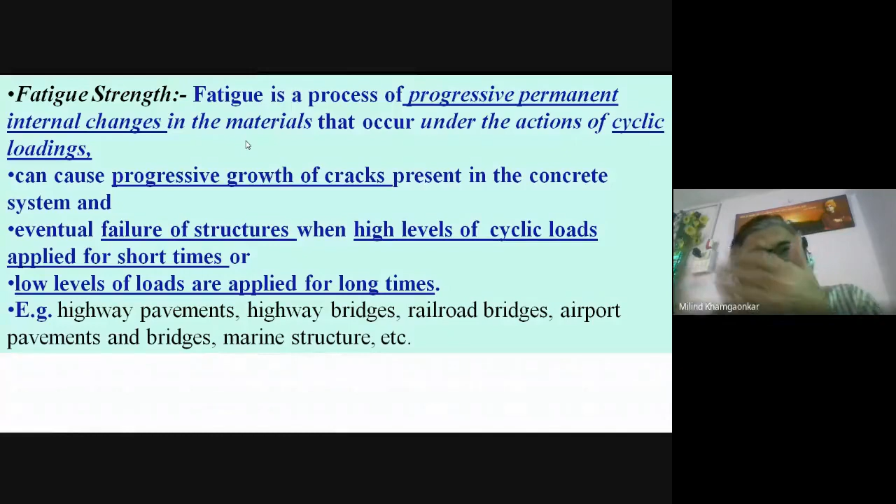Due to the internal changes in the concrete structure due to the application of constant load on that concrete structure. That load which is applied on the concrete may not be the load at failure. That may be less than the load at failure or the ultimate load. You must have learnt in your strength of materials, ultimate load or the maximum load - that is the maximum load a structure or a structural member can withstand before failure.

So the fatigue is the process wherein there are certain internal changes into the concrete material due to the application of the constant load or the cyclic load. That is the cyclic load means the load which is applied after certain cycles. That is the load application by the hammer, you can say.

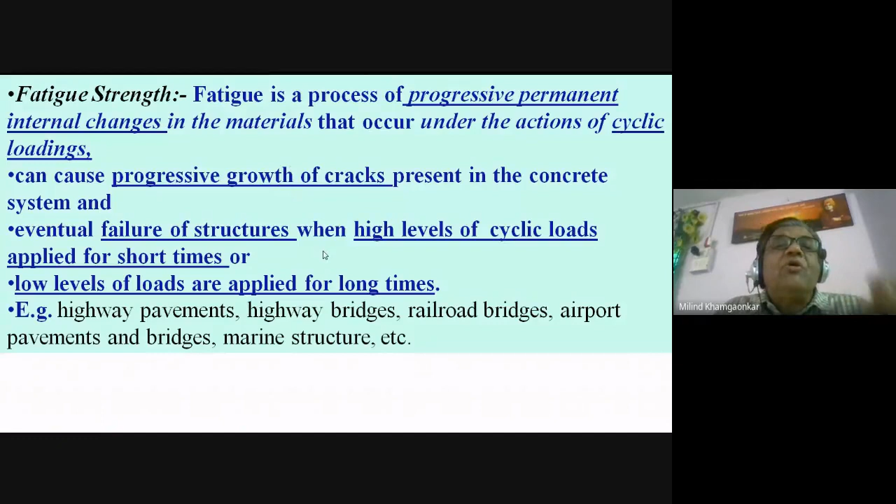To withstand this load, or to withstand this failure, the strength the concrete must have is called the fatigue strength. Fatigue occurs when the material is subjected to rapidly fluctuating and cyclic loads or stresses, and failure due to fatigue occurs at stress levels much lower than the yield strength, ultimate strength, or maximum strength of the material before failure under a static load. Static means constant load. This is very important.

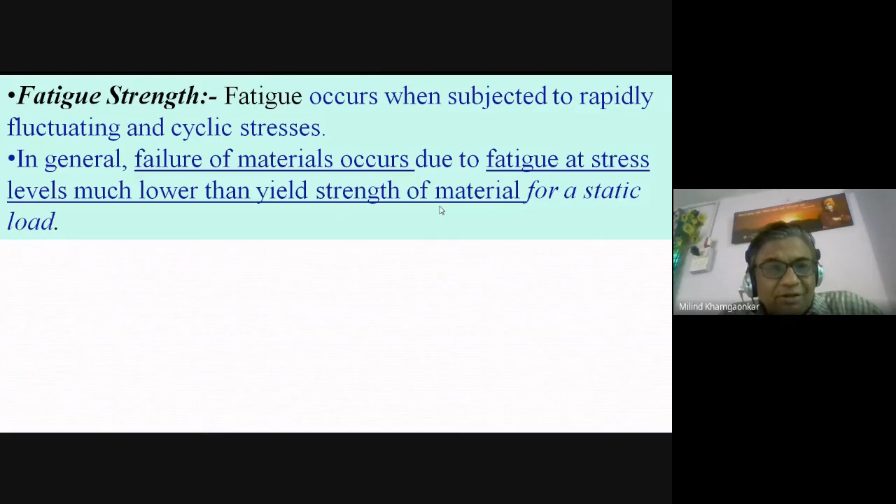Either rapidly fluctuating cyclic stresses or loads, or a low load less than the yield strength of the material for a longer period, result in two types of fatigue failure, as we have discussed. One is the sustained load, or a slowly increasing load, or a constant load near but below the strength under the increasing load.

This sustained load, slowly increasing load, or small load quantity is near or less than, below, the maximum or ultimate strength under an increasing load. This is known as static fatigue or creep rupture. So the first example of fatigue is static fatigue or creep rupture, meaning a low value of load less than the ultimate or maximum strength of the concrete, but applied for a longer duration. This is static fatigue.

The second type of fatigue failure occurs under cyclic loading. I have given the example of the hammer, or on roads, or on bridges, maybe a rail bridge or a road bridge, because cyclically, after a certain period, the load comes and goes. Maybe a 10 ton truck, or a 15 or 20 ton roller, or more than 20 tons - those are vehicles used in the military, crawler based vehicles.

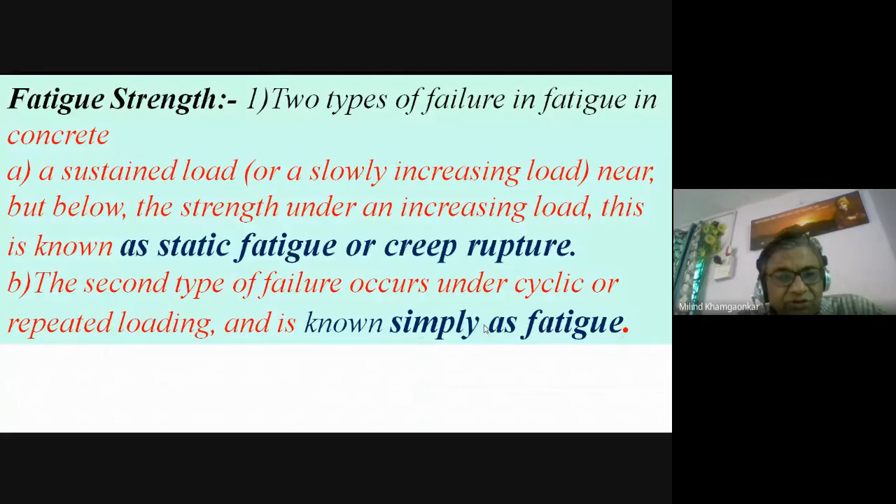These are called cyclic loading, repeatedly occurring or repeated loading. The failure due to this type of loading is simply called fatigue. So there are two types of fatigue: static fatigue or creep rupture, and fatigue, which has only that one name. What happens under repeated loads? Concrete suffers damage resulting from progressive growth of internal microcracks and fails at a load less than its static strength.

The fatigue strength of concrete is therefore a fraction of the static strength - it is less than the static or ultimate strength. It is a fraction of the static strength, or that lesser fatigue strength, that the concrete can support repeatedly for a given number of load cycles. At fatigue failure, concrete exhibits increased strains and reduced modulus due to progressive internal damage from microcracking.

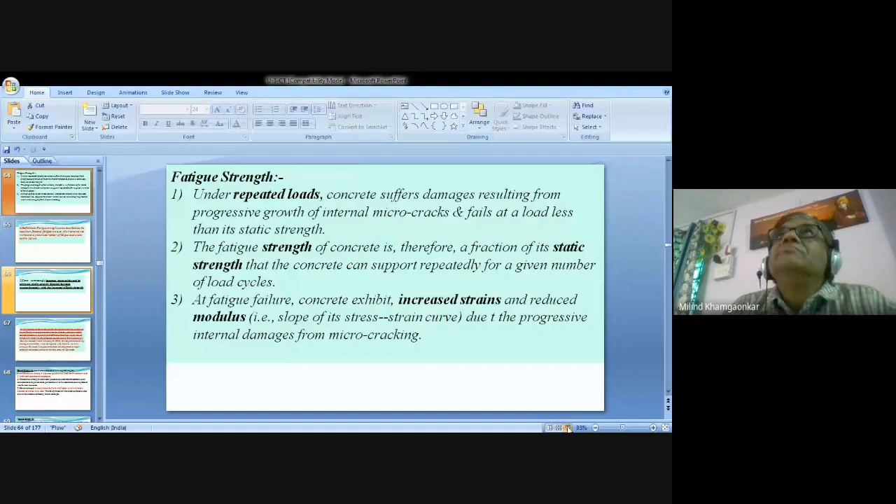What happens at fatigue failure? There is an observed increase in strain - the length may decrease, or the volume may decrease or increase. Strain, as you know, is the change in length or change in volume over the original volume. So these volumetric or length changes may occur or be seen under fatigue failure, with reduced strength. So the fatigue strength of concrete is therefore a fraction of the static strength.

This we have seen. At fatigue failure, there is observed an increase in strain strengths and reduced modulus of elasticity. Modulus of elasticity is the ratio of stress upon strain, so the modulus of elasticity of concrete decreases while strain increases, because if the denominator increases, the modulus will decrease. We will be seeing in the latter part of the lecture the modulus or elastic property of concrete.

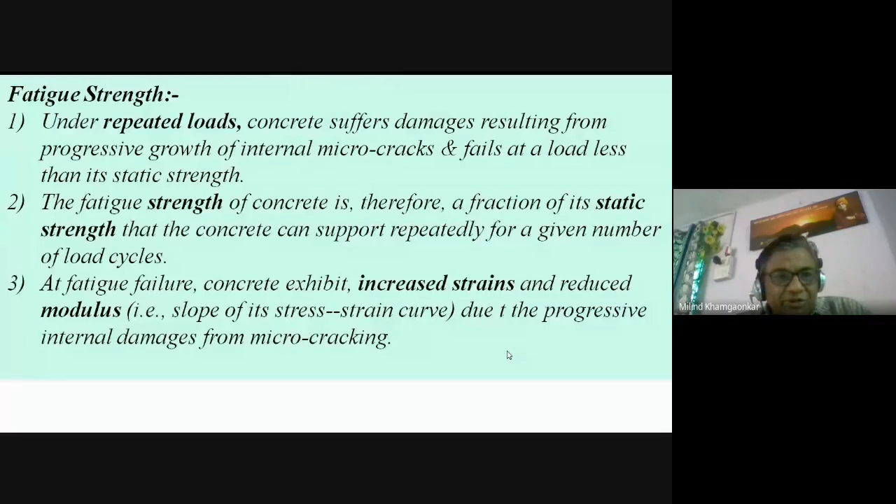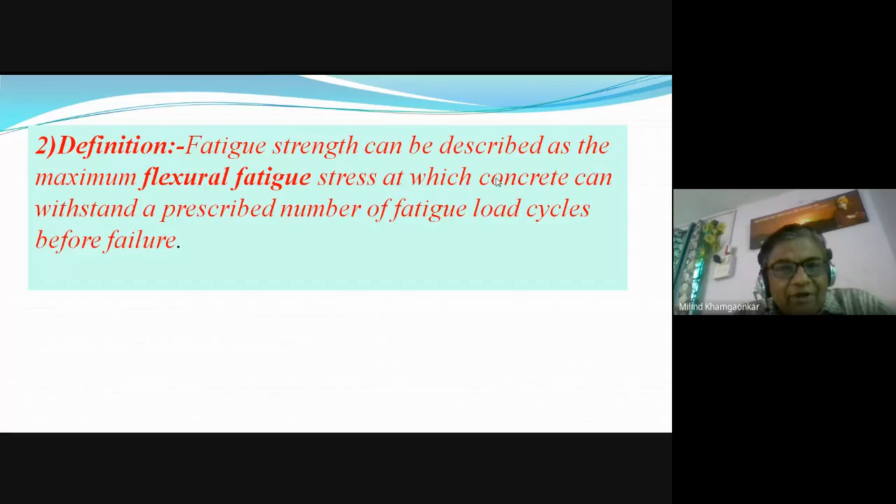So the definition of fatigue strength is: it is defined as the maximum flexural fatigue stress at which the concrete can withstand a prescribed number of fatigue load cycles before failure. I think you must have understood the meaning of fatigue strength, fatigue resistance, fatigue load, and fatigue failure. Theoretically, fatigue strength is described as the maximum flexural fatigue stress, that is the bending fatigue stress, at which concrete can withstand a prescribed number of fatigue load cycles before failure.

With the increase in the duration of application of the fatigue load, the concrete becomes more brittle, and its ultimate strain capacity does not increase proportionately with the increase in static strength.

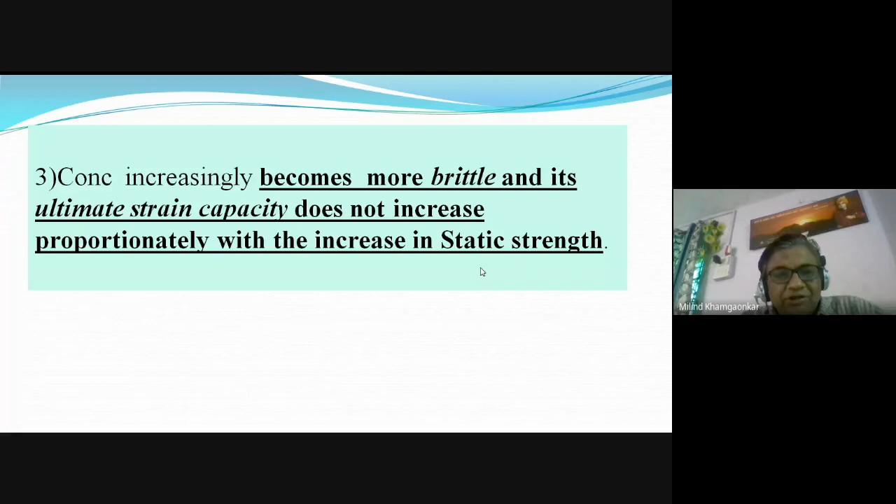Now what is observed in high strength concrete: we have seen that concrete having strength more than 40 or 50 newton per mm square, or 60 newton per mm square, is called high strength concrete. The elastic modulus of the paste, that is the cement and water paste, and that of the aggregate are more similar in high strength concrete. Since both have almost the same modulus of elasticity, this reduces the stress concentration on the aggregate as well as at the aggregate-paste interface, that is the transition zone, which makes high strength concrete less susceptible to fatigue loading.

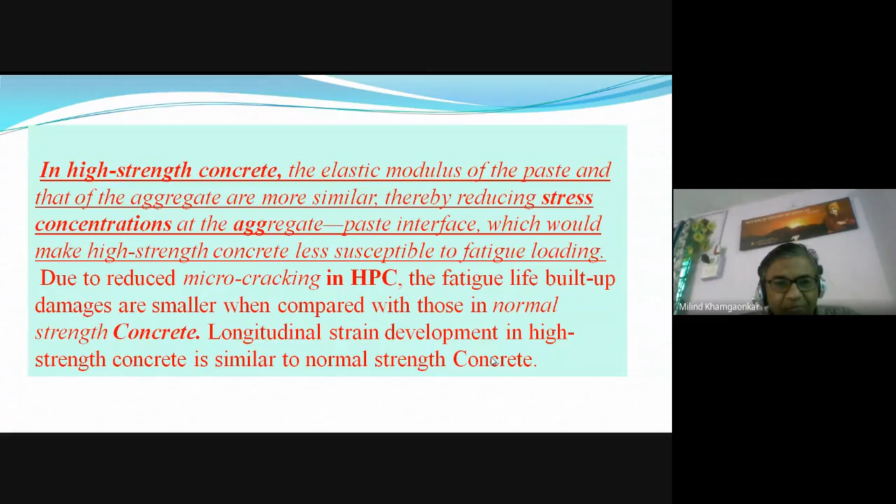Now we will be moving on to the next strength parameter, that is the bond strength. For concrete to have good compressive strength, tensile strength, impact resistance, and fatigue strength, there must be a very good bond between aggregate to aggregate through the cement and water paste, as well as the bond between the reinforcement provided in the concrete and the concrete itself.

That bond is also very important, because due to the bond between reinforcement and concrete, tensile stresses are transferred from concrete to reinforcement, since steel reinforcement is more tensile compared to concrete. Therefore, bond strength is considered important from two aspects: the bond strength between the cement-water paste or concrete and the steel reinforcement, and the bond between the paste and the aggregate.

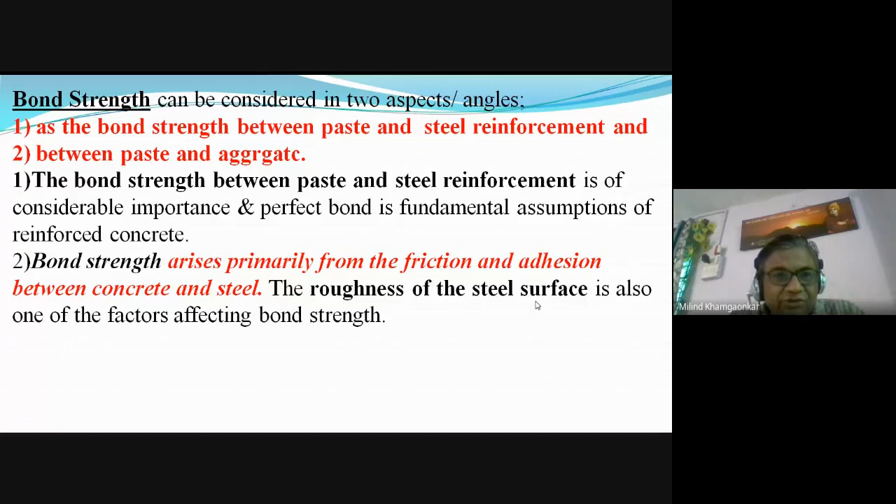The bond strength is also a function of the compressive strength, up to 20 MPa or 20 Newton per mm square. So bond strength also depends on compressive strength—higher the compressive strength, more is the bond strength.

For higher strength, the increase in bond strength becomes progressively smaller. That doesn't mean bond strength is small for higher strength concrete—it will be more—but as strength increases, say M60, M70, M80, the increase in bond strength is not as large as compared to lower strength concrete.

It is also a function of the specific surface of gel, meaning the fineness of cement. Cement with a higher percentage of C2S, dicalcium silicate (belite), will give higher specific surface of gel, thereby giving higher bond strength. On the other hand, concrete containing more C3S, or cured at higher temperature, results in smaller specific surface of gel, which may give lower bond strength.

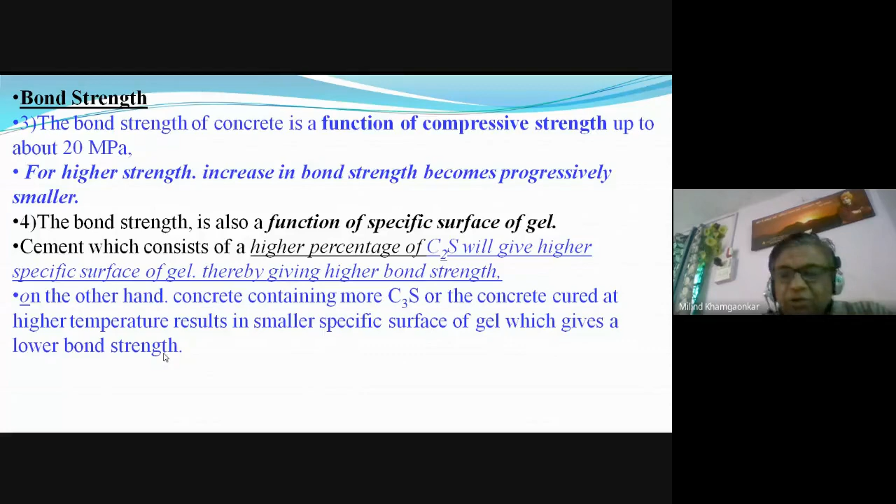The aggregate-cement bond strength matters too—concrete is like a chain in which aggregates are links bonded together by the cement paste. The strength of the concrete as a whole depends upon the bond strength of the hydrated, hardened paste, and therefore depends on the water cement ratio.

You all know the importance of the water cement ratio—lower the water cement ratio, more will be the bond strength. Therefore, the bond between the cement paste and the aggregate, or between aggregate to aggregate, also depends on the water cement ratio.

The water cement ratio determines the quality—that is, the density and porosity—of the product of hydration, the CSH gel, the cement and water paste gel. Stronger the gel bond, stronger is the concrete, and the gel bond will be stronger when the water cement ratio is less.

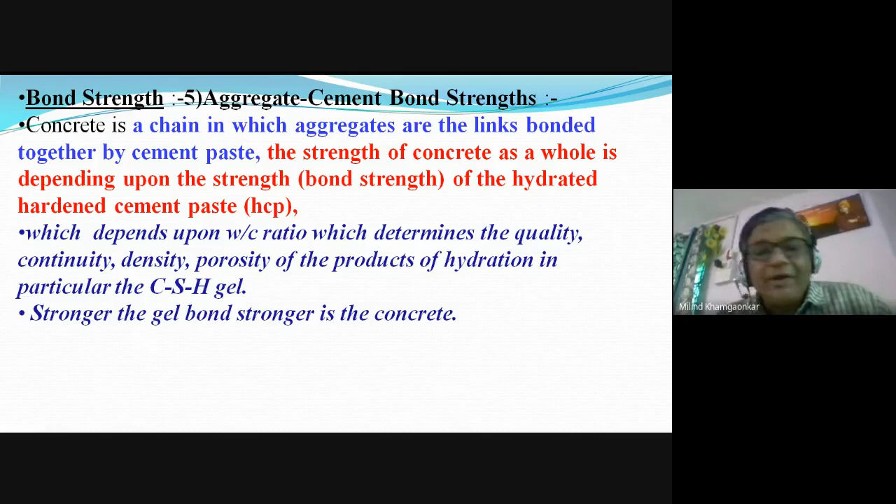So in ultimate analysis, it is the integrity of the transition zone that influences the strength of concrete, because the transition zone contains micro hair cracks inborn.

High pressure steam cured concrete produces a gel whose specific surface is about 1/20th of the specific surface of the gel produced by normal curing. Therefore, to some extent, high pressure steam cured concrete may give lower bond strength.

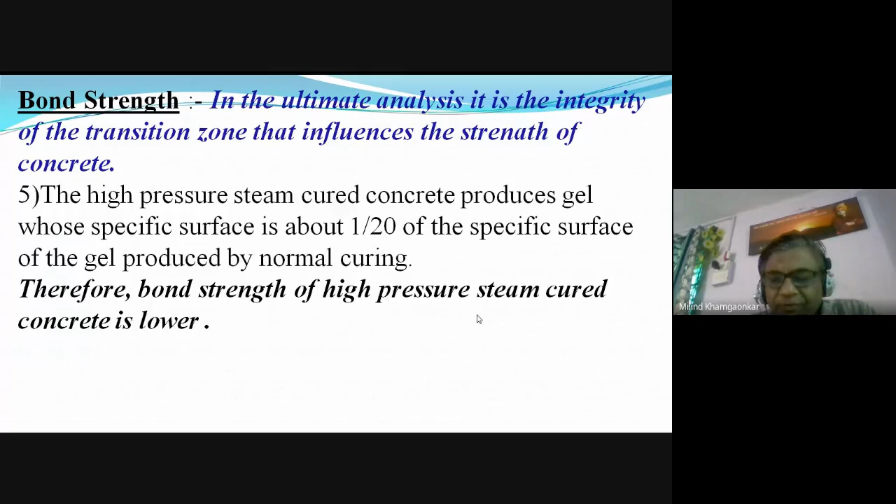Now friends, after discussing the meaning of bond strength and the various factors affecting it, we will move on to the elastic property of concrete.

What we want to find out is whether concrete is a perfectly elastic material, whether it is non-linear or non-elastic, or non-linear and elastic, or linear and non-elastic, or non-linear and non-elastic. What are these four things? First we try to understand, and then we will see where concrete fits.

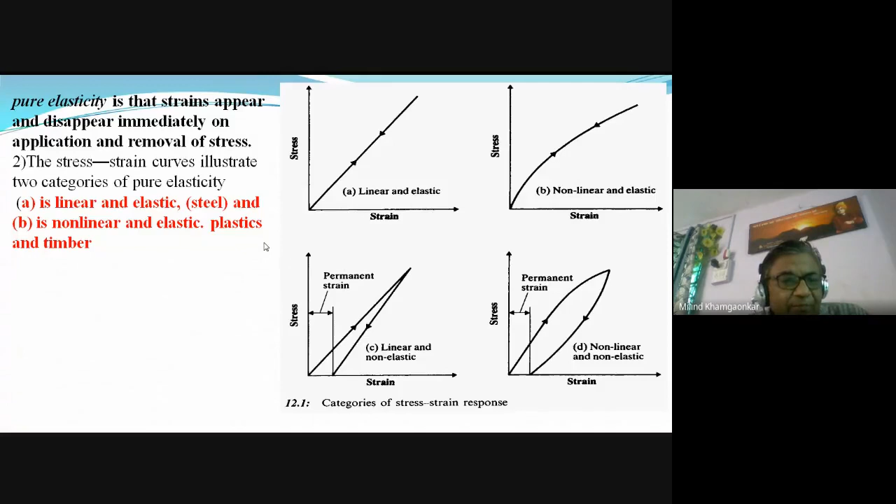The third type of material is linear. The ratio of stress to strain is constant, so the graph is linear, but the material is non-elastic. This means after the stress is removed, the material does not regain its original shape - whatever strain has occurred, the effect of that strain remains on the material.

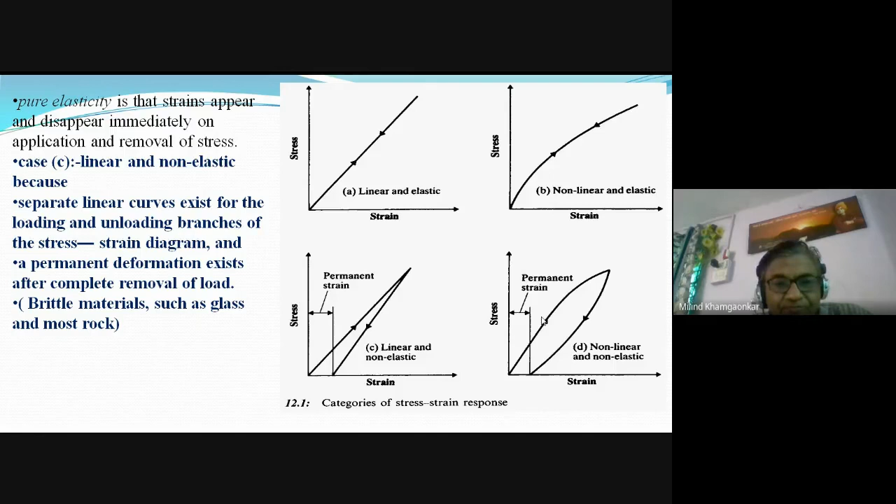Now the last one, that is non-linear and non-elastic. The fourth category, wherein with the application of load, it is non-linear, meaning the ratio of stress to strain is not constant - it is curved, like here.

As well as after removal of the load, the stress to strain ratio is not constant and it is non-elastic, meaning whatever strain has taken place remains on that material. So the fourth category case is non-linear and non-elastic behavior, where a permanent deformation exists after removal of the load. The area enclosed by the loading and unloading curve represents the hysteresis typical of concrete. This is for concrete - our material concrete comes in this category.

Concrete is not a perfectly linear material, where stress to strain ratio is not constant, it is varying, as well as it is non-elastic and does not regain its original shape, but there is the appearance of strain over the body. So it is typical of concrete in compression as well as tension, loaded to moderate or high stresses, but is not very pronounced at low stresses. That means if the load is low it doesn't show much, but when the load is very high, it shows.

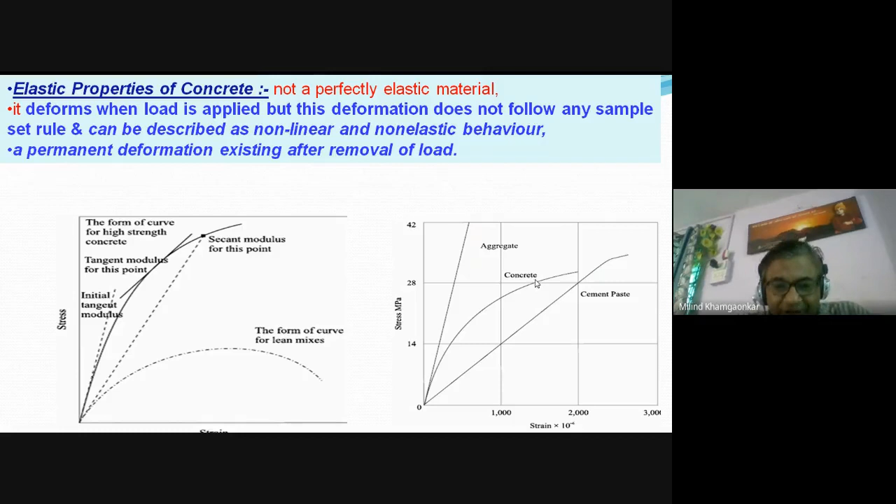Cement paste up to a certain load is also an elastic material, but concrete, a combination of both these, is not an elastic material. The deformation in concrete due to application of load depends upon the magnitude of the load - how big the load is, how much quantity of load, how many tons of load. As the load increases or decreases, the deformation or change in length and change in volume will depend on it. It also depends upon the rate at which the load is applied.

That means fast application of load versus slow application of load - the deformation will also depend on that. And the elapsed time after which the observation is made - meaning after application of the load, how much time has passed - the deformation on the first day after application of load may be less as compared to deformation or change in strain that takes place after 7 days, after 28 days. That is the elapsed time after which the observation is made. Now, how is the modulus of elasticity of concrete found out?

The cubes are casted, either the cubes of 15 centimeter by 15 by 15, or the cylinders, maybe a diameter of 10 centimeter by 30 centimeter, or diameter of 15 centimeter by 30 centimeters are casted. They are applied with the compressive load.

Uniaxial compression is applied, and with the increase in compression, how much deformation has taken place in that concrete cube - its change in length, change in width, change in depth, or change in volume, either for the cube or for the cylinder - is found out with the help of dial gauges fixed between a certain length. This dial gauge reading divided by the original length will give you the strain, and the ratio of the load applied divided by its area, that is the stress.

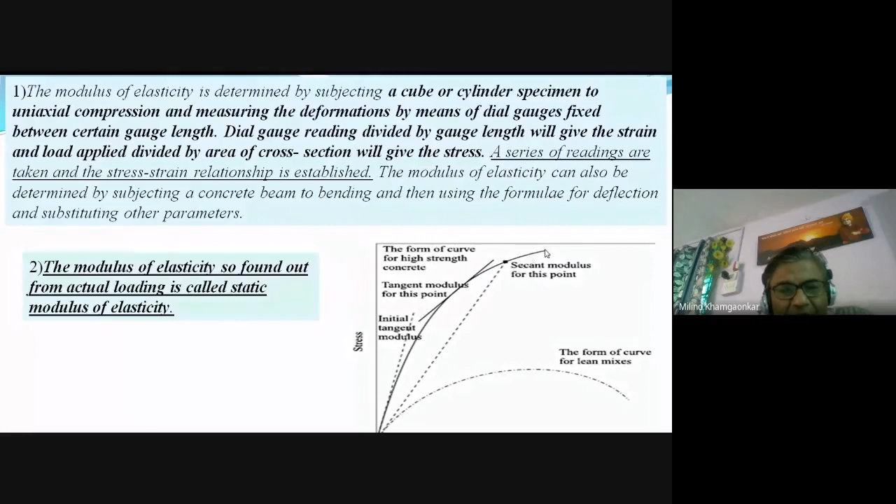So therefore, as there is no perfect relation or perfect ratio between stress to strain, there are various modulus of elasticities given for the concrete. I think you are trying to understand the things.

As we don't have the exact ratio of stress to strain, or we don't have a constant modulus of elasticity, that is the ratio of stress to strain, the modulus of elasticity of the concrete is given in 4 ways. The first is called the initial tangent modulus.

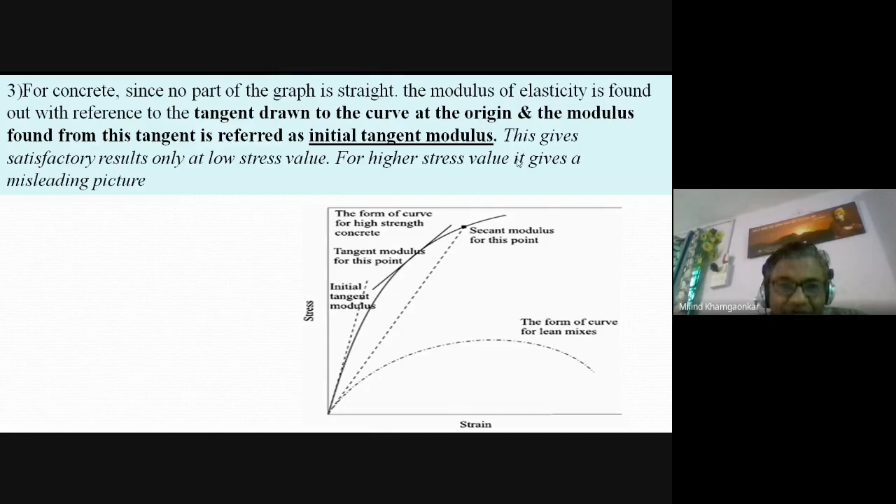The second is called the tangent modulus of elasticity. And the third one is called the secant modulus of elasticity.

Initial tangent modulus, the tangent modulus, the secant modulus of elasticity, as well as, as just now we have seen, static modulus of elasticity - so the modulus of elasticity values of the concrete are given in 4 ways.

The first is static modulus of elasticity. The second is initial tangent modulus. The third one is tangent modulus. And the last one is secant modulus. We have understood the meaning of the static modulus of elasticity.

Now we will try to understand the initial tangent modulus, which is nothing but when the graph is plotted between stress and strain for the concrete, which is a curved graph, this dark graph, and if a tangent is drawn at the origin of the graph, then the slope of this tangent line is called the initial tangent modulus.

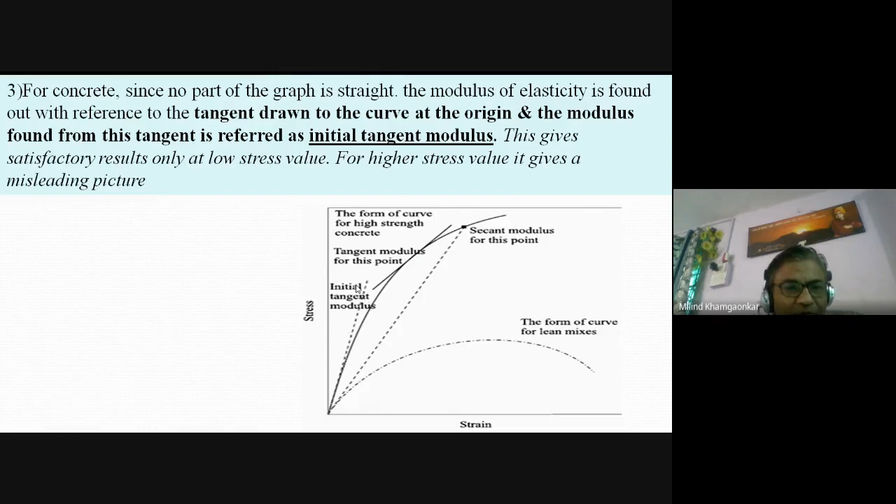So what is the initial tangent modulus of elasticity of concrete? It is the slope of the line which is drawn through the origin of this stress to strain curve of the concrete.

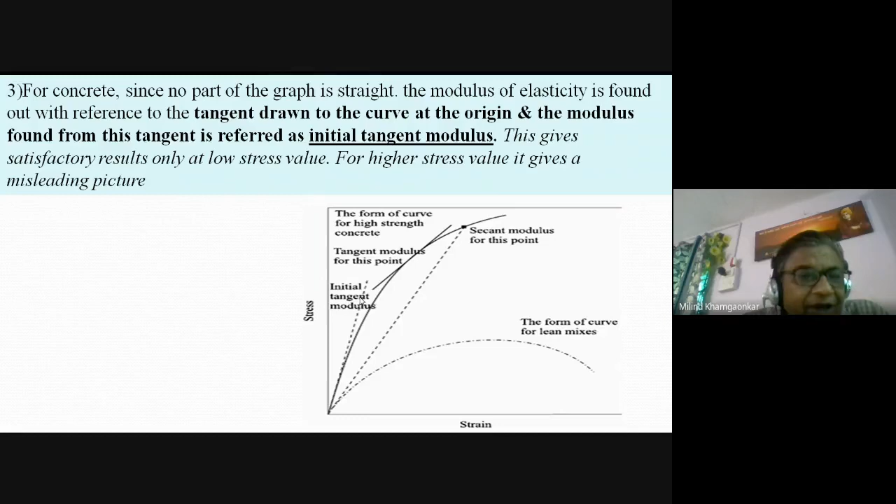Initial tangent modulus. For higher stress value, it may not give a correct result, but it is very good for low stress value. If stress value is low, then this is used. If it is higher, then we use the tangent modulus of elasticity.

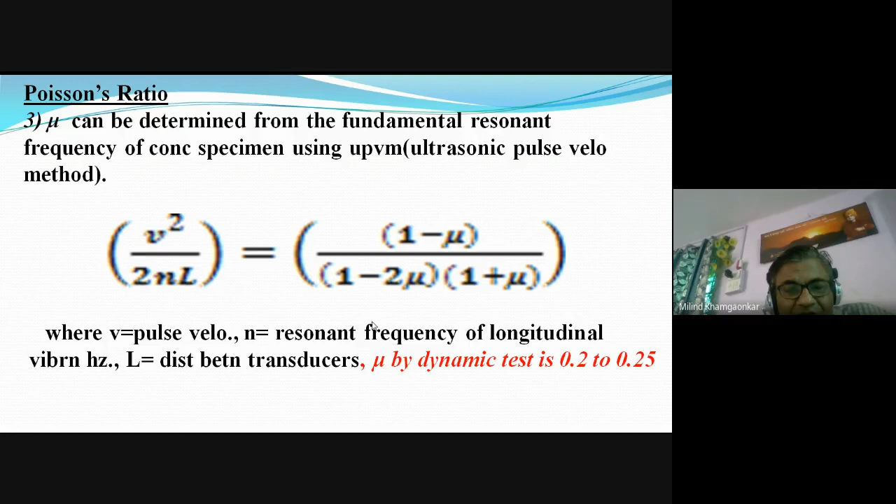It is determined by the pulse ultrasonic testing machine, the formula for which is given here. V is the pulse velocity, N is the resonant frequency, L is the distance between the transducers or the length of the specimen. If found by this method, the values are 0.2 to 0.25, and if found by strain measurement, the value of Poisson's ratio is 0.13 to 0.21.

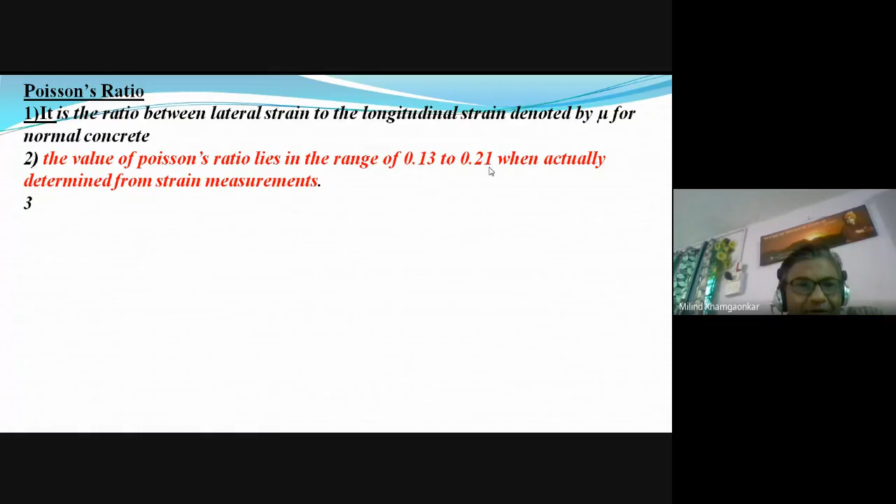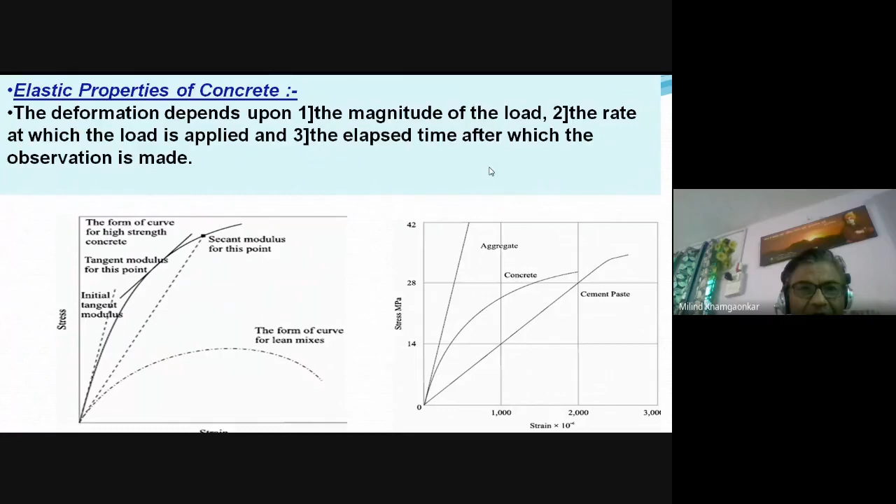We have seen the four categories earlier: linear and elastic material, non-linear and elastic material, linear and non-elastic material, and non-linear and non-elastic material.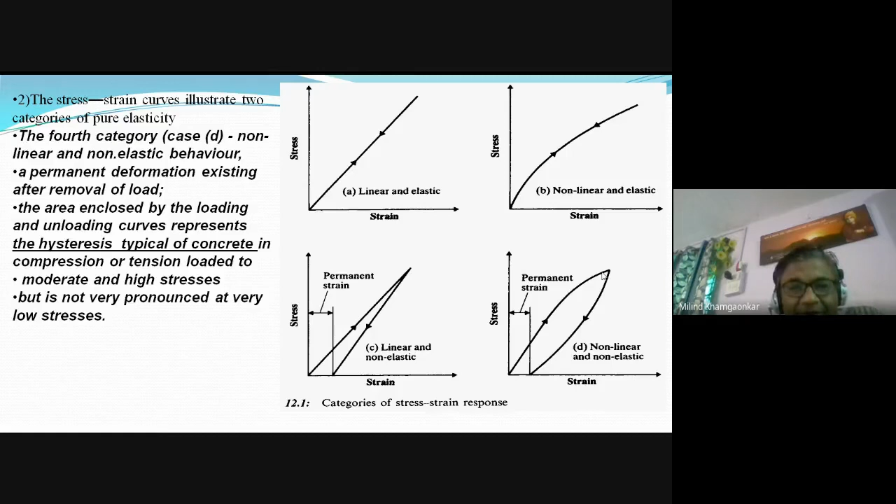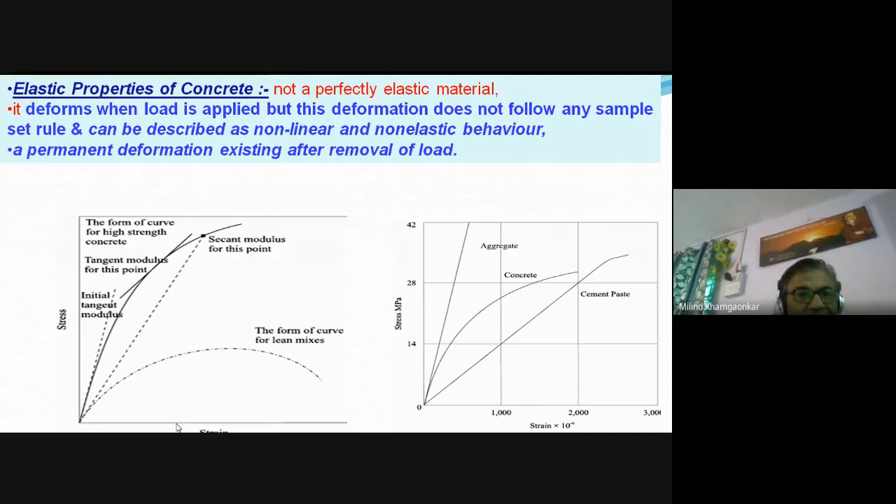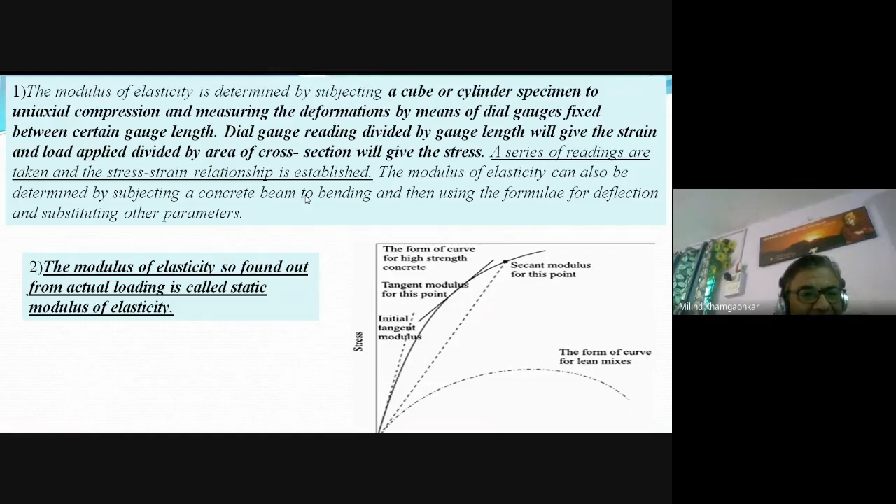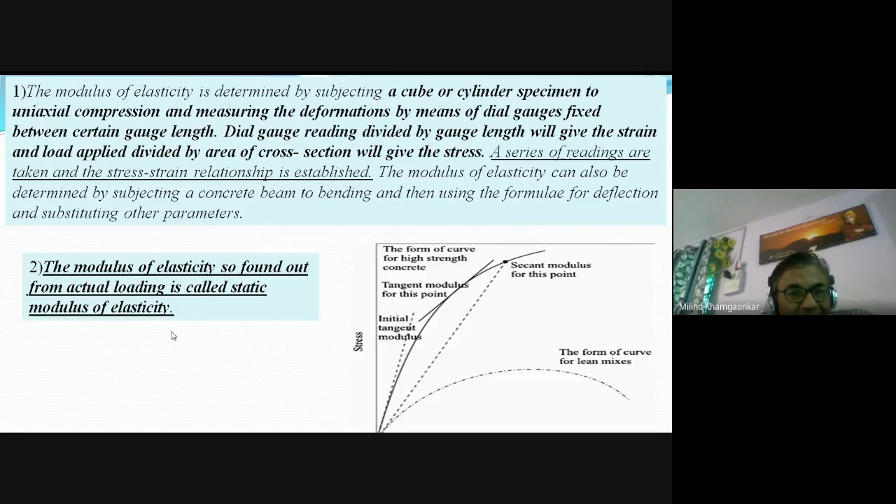Then we have seen the three modulus of elasticity of concrete. The first one is the static modulus of elasticity, found by plotting a graph between the applied stress, applied load, and the strains on a concrete cube or cylinder with the help of certain dial gauges. We can find the stresses by dividing the applied load by the area, and plot for various loads, that is for various stresses. We can find stress, strain, and plot a graph, and find the ratio of stress to strain, that is called the static modulus of elasticity.

But as this ratio is not constant, we use three types of modulus of elasticity for concrete. The first is the initial tangent modulus, that is the tangent drawn at the origin of this curved graph between stress and strain. After drawing the tangent at its origin, the slope of that tangent line, which is the ratio of stress to strain on this tangent line, is called the slope. This gives the initial tangent modulus of elasticity.

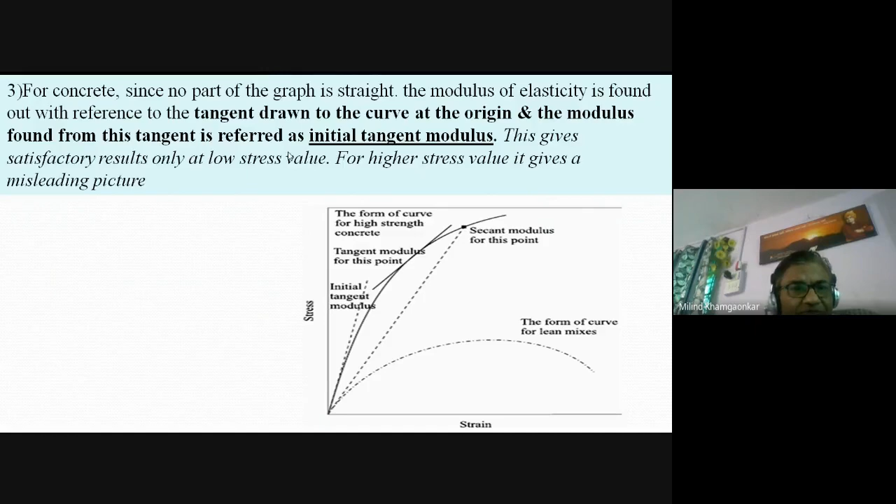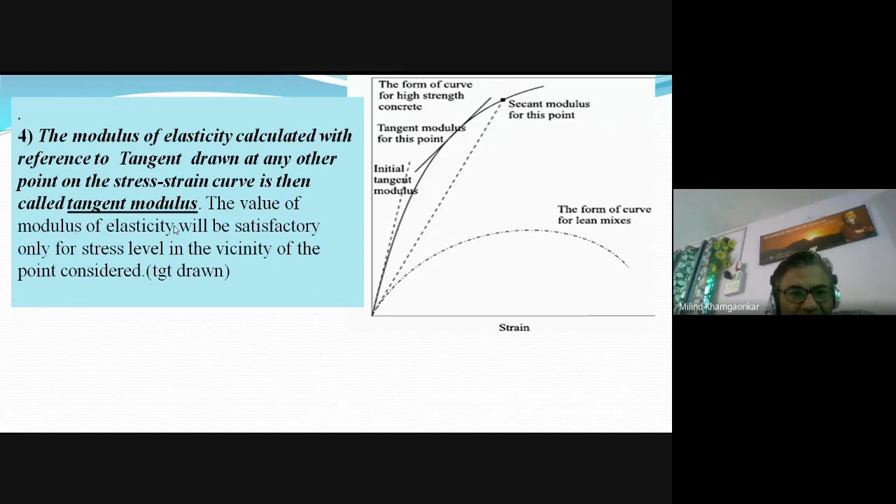For higher stress values it is not used, for lower stress values it gives satisfactory results. For higher stress values up to a certain limit, the second modulus, the tangent modulus of elasticity, is used. It is nothing but the slope of any tangent drawn on this stress to strain curve of concrete, other than at the origin and the maximum load point. The slope of this tangent line is called the tangent modulus of elasticity.

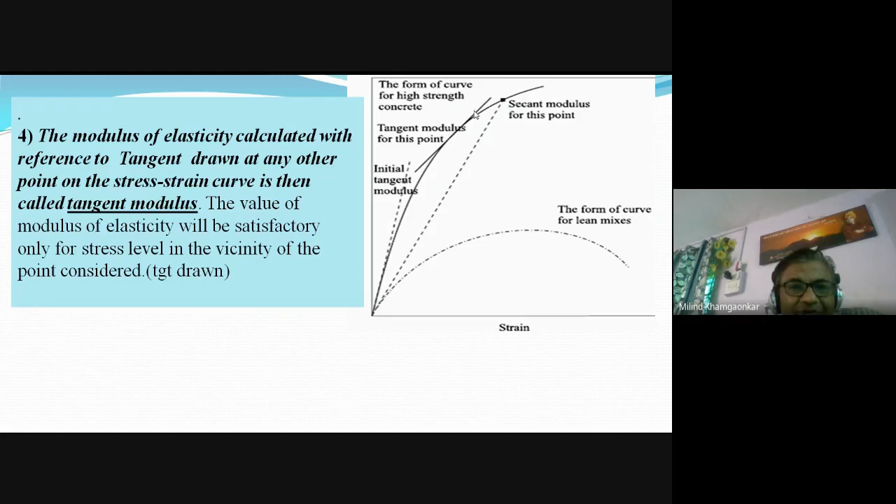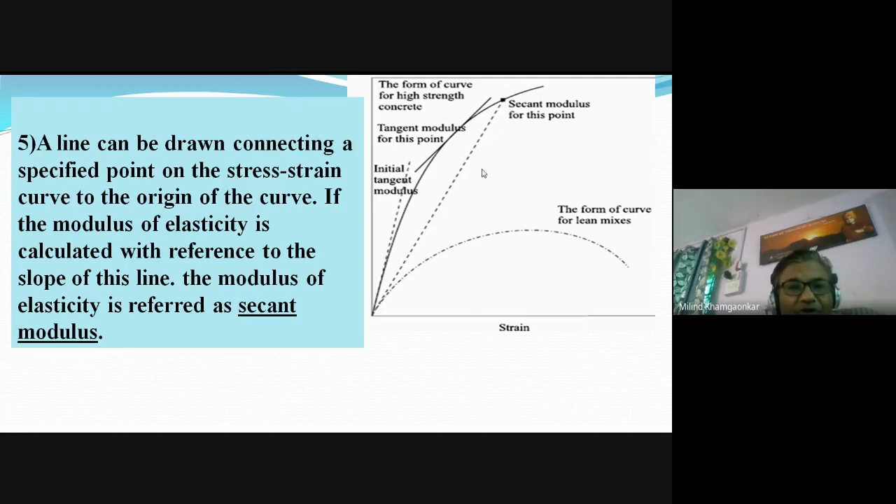The third one, the secant modulus of elasticity, is nothing but the slope of the line from the origin to the point of maximum load or any point on this curve. The slope of this line is called the secant modulus of elasticity, also called the chord modulus of elasticity. Generally this modulus of elasticity is used for concrete.

Then we have seen the relationship between modulus of elasticity and strength, where we concluded two points: as strength increases, modulus of elasticity increases, and it is also dependent on the wetness of the concrete. If the concrete is wet, modulus of elasticity is more; if the concrete is dry, modulus of elasticity is less, for the same strength concrete. Also there is a relationship between strength and modulus of elasticity given by Indian Standard 456.

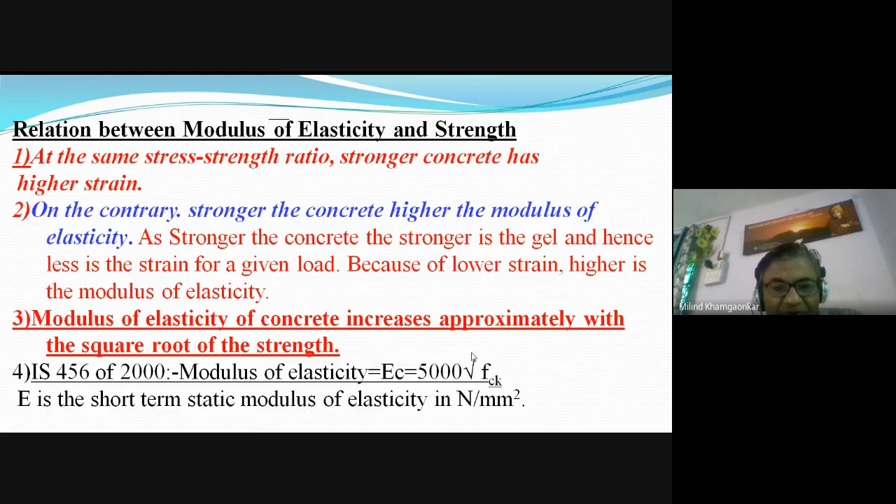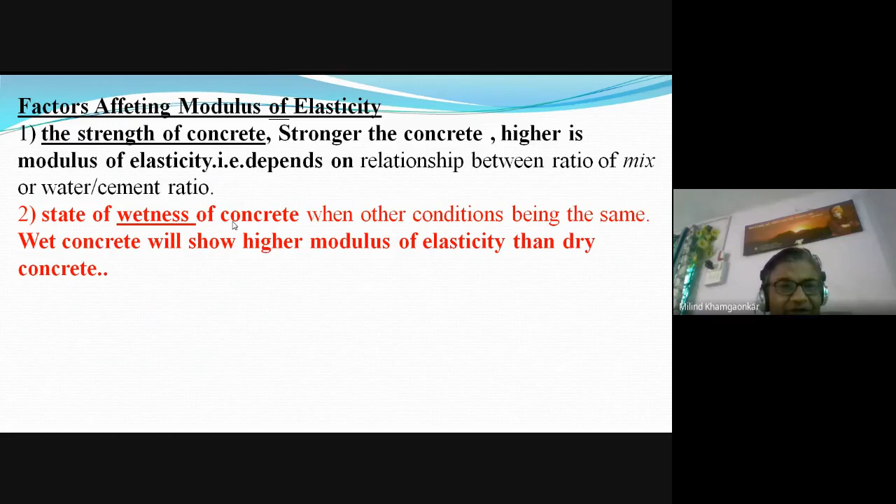Modulus of elasticity of concrete is equal to 5000 times the square root of FCK. FCK is the compressive strength or characteristic compressive strength. Various factors affecting modulus of elasticity are: strength, wetness, as well as the aggregate type, lightweight aggregate and heavyweight aggregate. Heavyweight aggregate gives more strength and more modulus of elasticity.

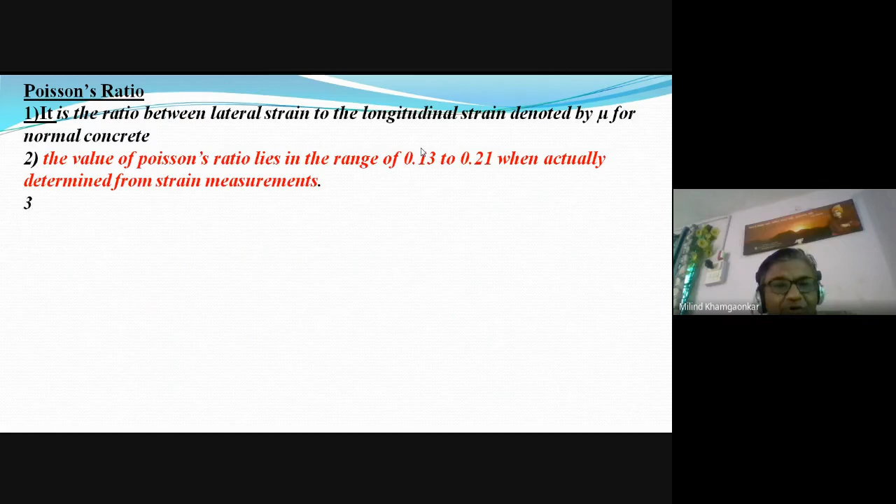Then we have seen the details of Poisson's ratio, which is the ratio of lateral strain to longitudinal strain. This ratio is called Poisson's ratio, denoted by mu. Its value is between 0.13 to 0.21 for concrete.

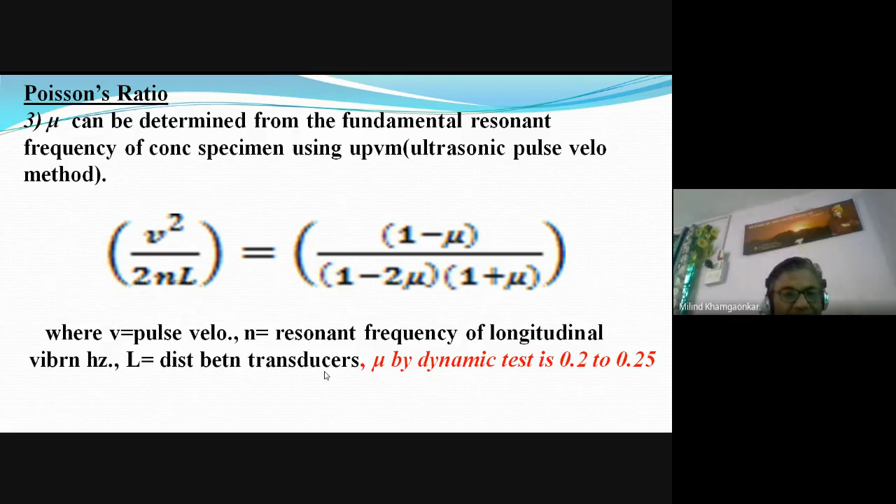Then we have seen how it is found out using the pulse ultrasonic testing machine. This is the formula, and these are the various meanings: V is the pulse velocity, resonant frequency, and L is the length between the transducers. This value is 0.2 to 0.25.